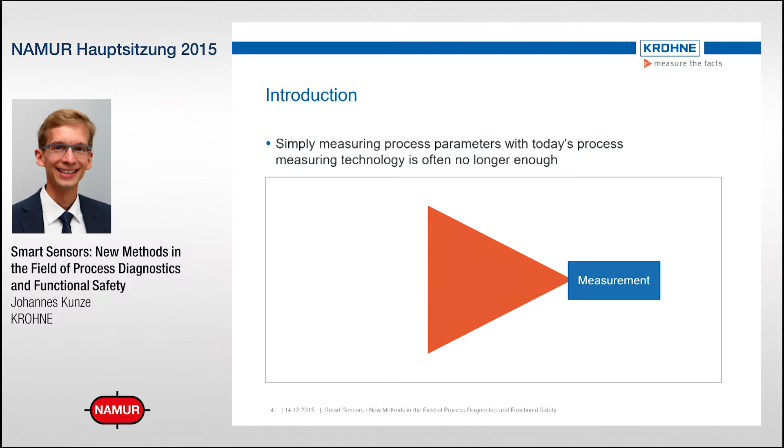We need process diagnostics. In case of safety loops, functional safety becomes more important. You need a functionally safe field device with self-diagnostics with high diagnostic coverage.

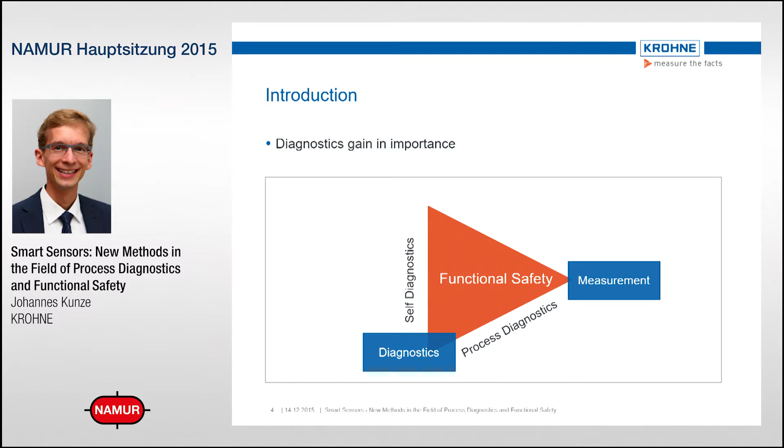That's quite a lot of diagnostics which I just mentioned. Since more diagnostics may result in false alarms, these smart devices could reduce the device availability or even the plant availability. Therefore, the question is, does it mean more diagnostics, less availability? Well, it's a challenge for us measurement instrumentation companies to provide you accurate, reliable measurements with lots of process and self-diagnostics without reducing your plant availability.

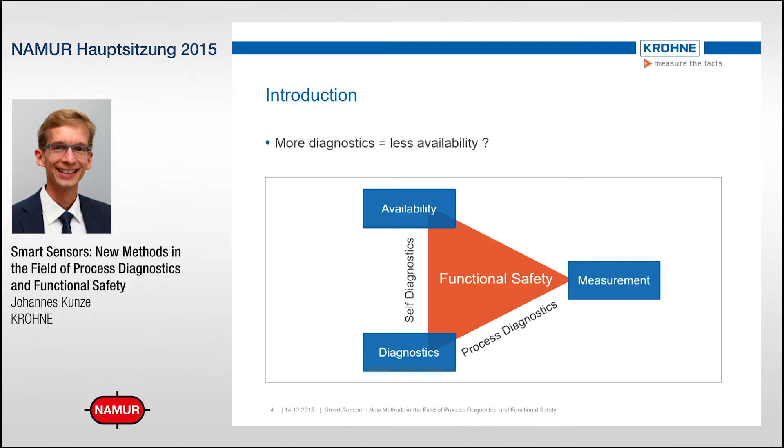Now let's continue with the process diagnostics. Let's start with the process diagnostics for flow meters.

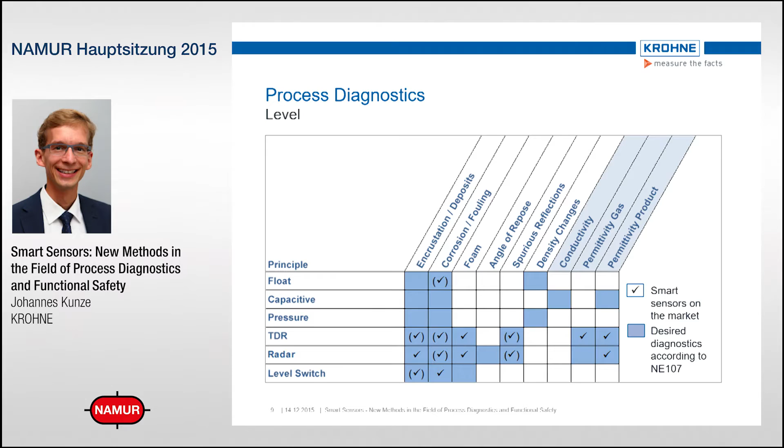Now I would like to focus on a diagnostic which was quite critical for a long time: entrained gas and flow measurement. In general purpose measurement devices such as Coriolis mass flow meters, entrained gas typically stopped the entire measurement. Now we are able to measure with entrained gas and perform diagnostics.

But what's the challenge with entrained gas and Coriolis meters? Entrained gas is a kind of two-phase flow, which exists in various flow regimes. For example, mixed bubble flow, when we have evenly distributed gas bubbles, or fully separated wavy flow.

Unfortunately, the flow regime varies strongly. It is quite transient, which makes measurement difficult. Two-phase flow occurs in various situations. Sometimes it could be dangerous, as for example with cavitation, but sometimes it's really unavoidable in the startup of a system or sourcing of storage vessels when they become empty, or the empty-full-empty batching, or if you have outgassing of a process liquid.

All these cases have one thing in common: you should be able to measure the process fluid. In addition, you should also be able to detect the entrained gas.

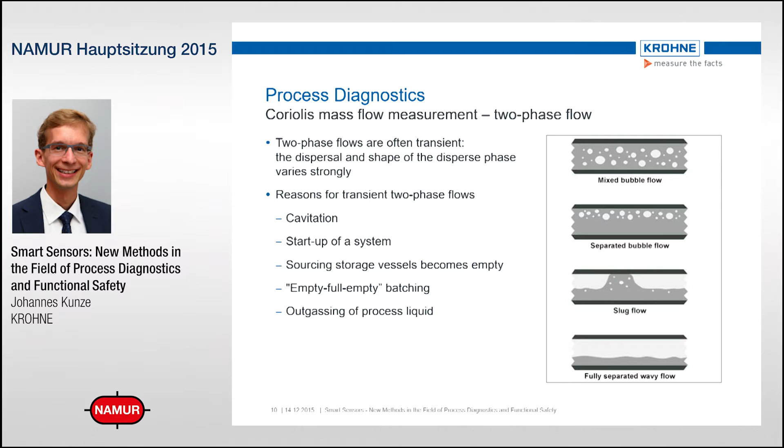So let's discuss the first aspect, the measurement. In Coriolis mass flow meters, the flow tube oscillates, which is necessary to use the Coriolis effect. Within this oscillation, the liquid and the gas phase have a relative movement, which causes a damping of the oscillation. In addition, the gas bubbles are compressed, which also damps the oscillation. The resulting oscillation amplitude of the tube varies a lot and becomes quite small.

Furthermore, the signal-to-noise ratio decreases by entrained gas. We have quite strong transients in the density and the mass flow, and therefore the flow tube oscillation frequency varies strongly. And finally, the signal-to-noise ratio is decreased.

Conventional mass flow meters could not follow the frequency changes, and they could not compensate the amplitude variations. Therefore, the tube vibration could not be maintained. The mass flow meter has quite large measuring errors and finally stops the measurements.

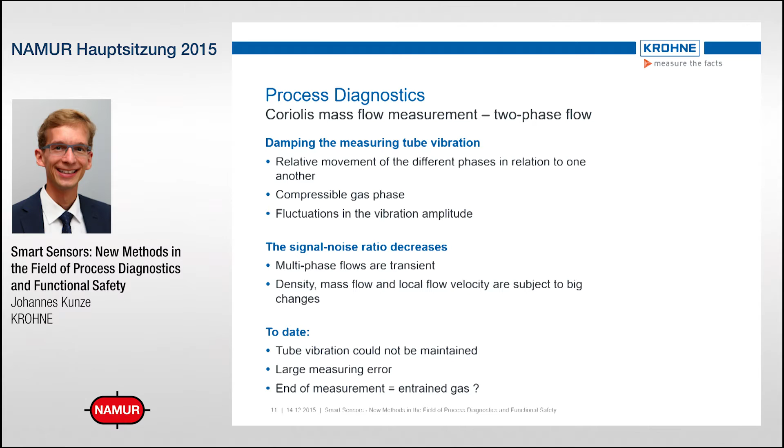This was basically a quite good diagnostics for entrained gas, because typically the mass flow meters stop the measurement in case of entrained gas. These conditions are really challenging, these flow conditions, and we at Krohne accepted this challenge.

We developed the so-called entrained gas management, a new concept for signal processing. With this type of processing, the meter can measure with any amount of gas from 0 to 100% gas content. And if you have similar measurement conditions, similar pressure, for example, you also get reproducible measurement results.

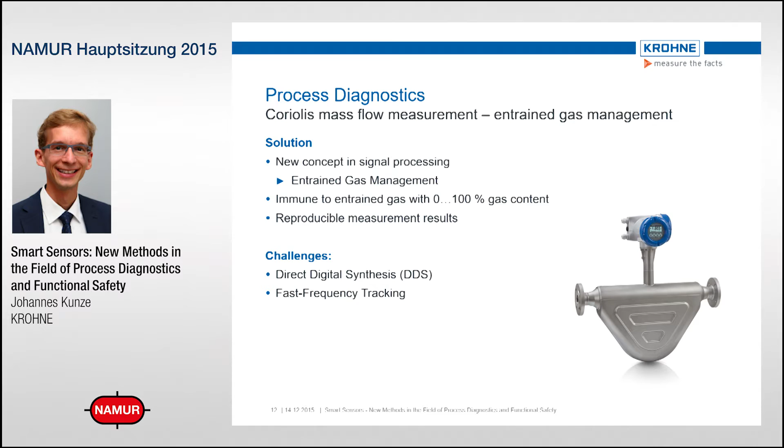The two key measures in the entrained gas management are direct digital synthesis, short DDS, and the fast frequency tracking. In order to understand these effects of these measures, let's have a brief look at the Coriolis signal processing within a sensor electronics in a Coriolis mass flow meter.

So the flow tube is excited by an electromagnetical actuator. The signals for this actuator are generated by the DDS, which is an amplifier and a digital to analog converter. And finally, in the digital world, it's a signal generator. It generates a sinusoidal signal. It's a synthesized sinusoidal signal with a known amplitude, frequency, and phase.

And the flow tube oscillates. The oscillation is being measured by two sensors, and the sensor signals are amplified, converted to the digital domain, and demodulated using the signals from the signal generator. There we have really narrow bandwidth demodulation, and therefore the noise generated by the entrained gas can be suppressed.

The demodulation generates two complex sensor signals consisting of the real and the imaginary part of both sensor signals. These sensor signals can be used to feed the amplitude control and the phase control. The phase control is the part which is the so-called fast frequency tracking. It can follow the resonance frequency of the tube really fast. And the amplitude control can compensate the amplitude variations of the sensor tube quite well.

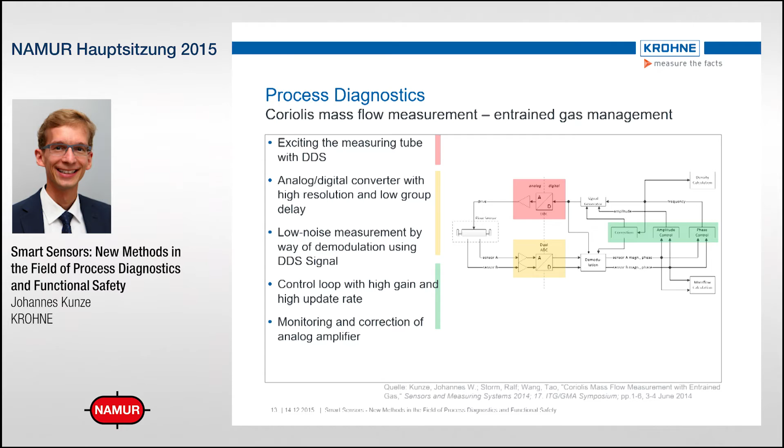In our testing, we were not able to stop the tube oscillation, independent of any amount of gas. So the sensor signals can be used, of course, for the most important part, the density calculations, there we use the frequency, and the mass flow calculations, there we use directly the sensor signals.

Now we have solved the first challenge. We can measure with any amount of entrained gas. Now we have the second challenge: detect the entrained gas. For this purpose, we make a statistical evaluation of the sensor signals and the drive current and generate the so-called two-phase signal. So what's up with the two-phase signal?

Let me give you an example. Here we have a measurement of a full-empty batching. This means the tube is empty in the beginning and the end of the batching process. You see the mass flow is in the beginning 0, then it increases up to a certain level, it decreases, and then we have reverse flow, you see, and at the end, of course, the flow is again 0. Having a look at the density, in the beginning it's air density, the tube is empty. Then we have water density, a filled tube, and at the end we have again an empty tube, air density.

So the smart operator could see that we have obviously entrained gas in the beginning and the end of this batching process. But we are not talking about smart operators, we are talking about smart meters. And therefore we have the two-phase signal. You see that the two-phase signal increases in the beginning of the batching process and in the end of the batching process.

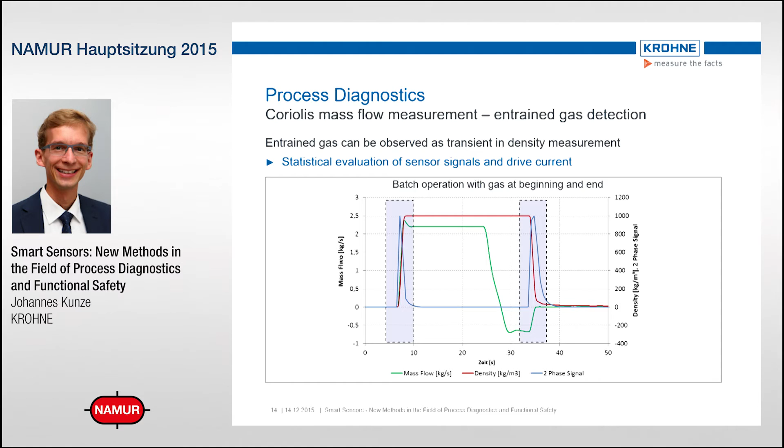This allows us to detect, on the one hand, the entrained gas, and we could even estimate the amount of entrained gas by having a look at the maximum of this two-phase signal. If you are only interested in detecting two-phase signals, we can set a threshold which can be used in the NE107 signaling, which I would like to address in the following.

The NE107 specifies the status signal of field devices. Diagnostics should be provided action-oriented and evaluated by using one of the following 4 signals, which you might know: failure, out of spec, function check, or maintenance required, each with a separate color.

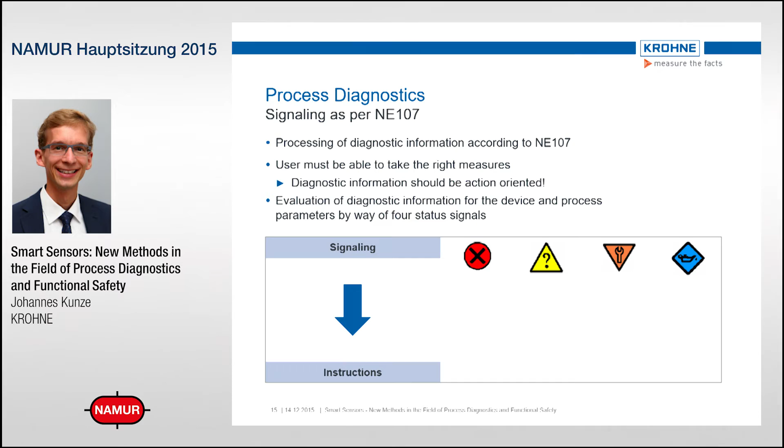Giving an example for the new OPTIMASS 6400 SIL, for Entrained Gas, the meter shows out of spec, a message that two-phase flow was detected, and it also shows you a countermeasure check process for Entrained Gas. That's what you could see on the screen of the device. Of course, the same status information is provided via bus interfaces.

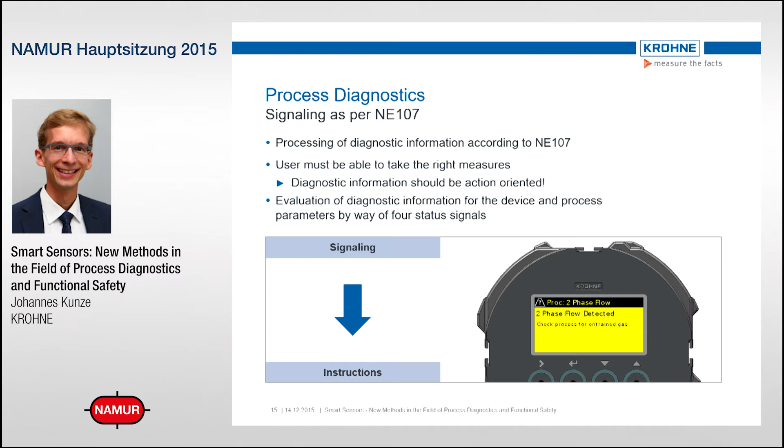Field devices have typically much more diagnostic information, since it's quite hard to understand the problem. In case of a status message, we enhance the status concept in the NE107 by providing groups called sensor, electronics, configuration, and process. A status message is sorted into one of these status groups.

So you directly can see if the problem is in the sensor, electronics, or if it's a configuration or process problem. Furthermore, the status groups with variable status signals can be selected by the operator, for example the two-phase flow. Only the operator can decide if entrained gas is critical, if it is a failure, or if it should not be signaled at all.

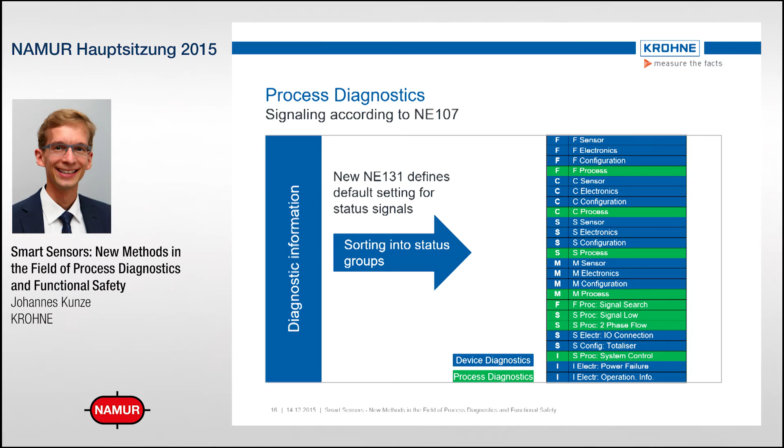Considering self-diagnostics, we are approaching the second part of this presentation, which is functional safety, which has a lot to do with self-diagnostics. Currently, there are quite some functionally safe devices according to the 61508 standard SIL 2 on the market. 5 years ago, SIL devices were quite different than today. SIL devices started as proven-in-use devices, which were standard devices that later got a SIL certificate and failure rates. Today's devices, however, were developed according to 61508, which is a significant difference.

They have higher diagnostic coverage, and therefore they need much more process and device diagnostics, in particular the latter. All these diagnostics tend to reduce device availability for the sake of safety. Furthermore, they require safe prioritization, which is typically quite complicated.

Statistics of field devices in plants show that typically 3 to 5% of the measuring points are safety applications. The rest, 95% or even more, do not need SIL devices, or at least they do not want the mentioned disadvantages. Therefore, some field device manufacturers decided to sell two different devices, one for SIL and one for non-SIL. This, however, is quite unpleasant. This makes prior use, which is requested in the NE130, quite difficult, because you have a really small amount of SIL devices and it's hardly possible to make any statistics with such a small number.

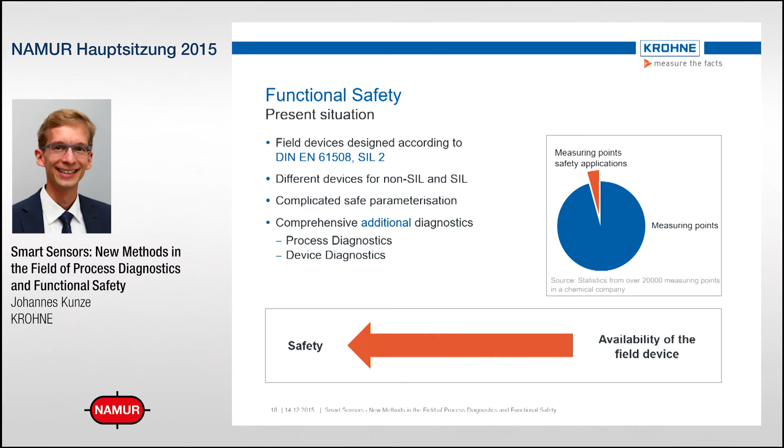That's the reason why NAMUR discussed SIL devices in the new version of the NAMUR standard device, the NE131. This SIL device should be developed according to 61508, SIL 2 and low demand. It should have, and that's the most important aspect, the same hardware and same software for SIL and non-SIL devices. So there's no differentiation between a SIL or non-SIL device, you buy the same device. Then it's possible to use the prior use approach according to NE130.

Then diagnostics should be reduced to only the necessary diagnostics. This does not mean less diagnostics, it means only the important or critical diagnostics should set the failure signal. In particular, considering process diagnostics, only detected imminent irreversible damages which could happen to the meter should be signaled with a failure signal. Other process diagnostics should only be signaled by, for example, out-of-spec or other information.

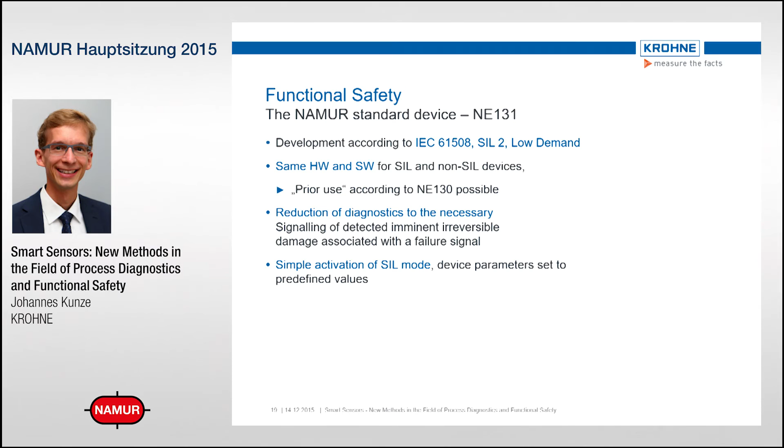Then a SIL device has, of course, to be switched to a SIL mode, and this should be done fairly simply. A lot of parameters which are SIL critical should be set to predefined values, and those which you can configure shouldn't be many parameters, and they should be documented quite simply. Finally, a SIL device should not have a best-before date. There shouldn't be a formal limit on useful lifetime in functionally safe devices.

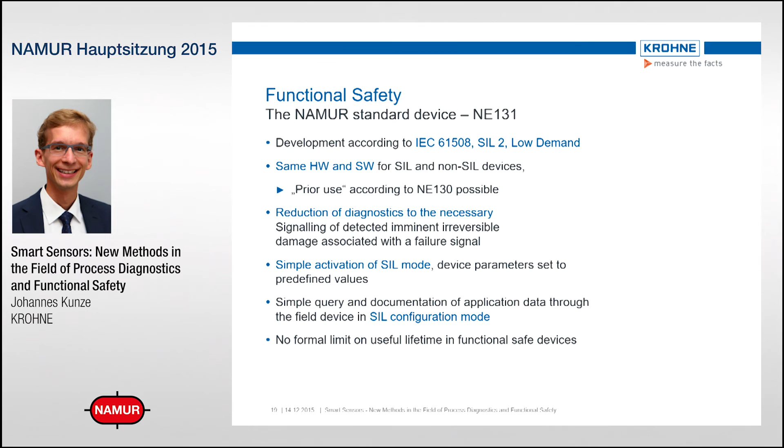Besides all these requirements for a SIL device, there are some other things which you could do wrong in the design of a SIL device. I will show you now three examples for a SIL device, a present situation on the market, and a smarter solution. Let's discuss safe parameterization.

A safe parameterization should be performed via a safe channel. Parameterization was done so far via HART, but HART is not a safe channel because the requirements for field bus communication, such as checksums or sequence numbers, are not fulfilled. Therefore, SIL devices on the market today always need a verification at the local display. So you can still configure via HART, however you have to go to the display and set the device to SIL mode. This is quite unpleasant if the device is in your plant at 10 meters height, if it's not accessible.

Therefore, we thought about a solution which is a little bit smarter. We developed a concept which is certified and patented, which allows you to verify the parameters also via HART. So you can set up your meter completely via HART without accessing the meter.

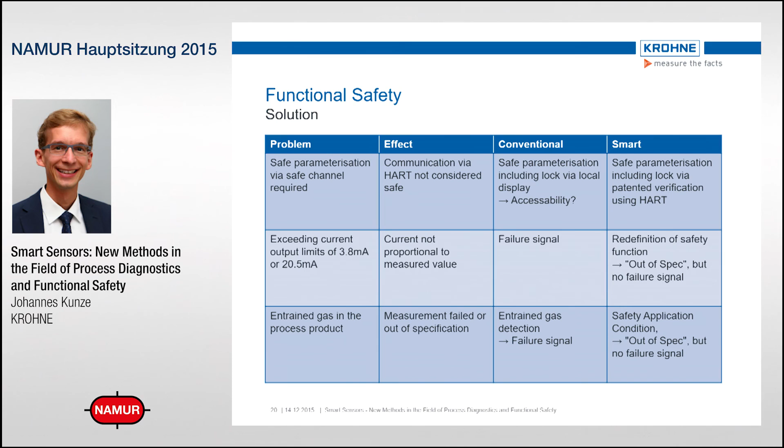All these aspects are part of the KROHNE SIL strategy, which we realized for the first time in the OPTIMASS 6400 SIL, the new SIL device in the KROHNE family. This device has a SIL and non-SIL mode, using the same hardware and software in both safety modes.

Well, then proof test for such a device should be simple. You know, SIL devices always have a small number of dangerous undetected failures, which cannot be detected by internal diagnostics. Therefore, you need to make a proof test. A proof test by just pressing a button on your device cannot detect these undetected failures. Otherwise, they wouldn't be undetected by the internal diagnostics. We minimized in the design the number of undetected failures, which maximizes your proof test interval.

And if you have to perform a proof test, normally you have to do it once every year, it should be possible to make a partial proof test. That's an inline proof test without removing the meter. The proof test coverage for such a partial proof test is more than 70%. Of course, with a full proof test, you have a much higher proof test coverage.

Then a safe device, a SIL device, must have a safe parameterization. And this really should not be complicated. It should be as simple as with non-SIL devices. You should be able to make this safe parameterization via HART or a local display, and it should be possible within less than 2 minutes.

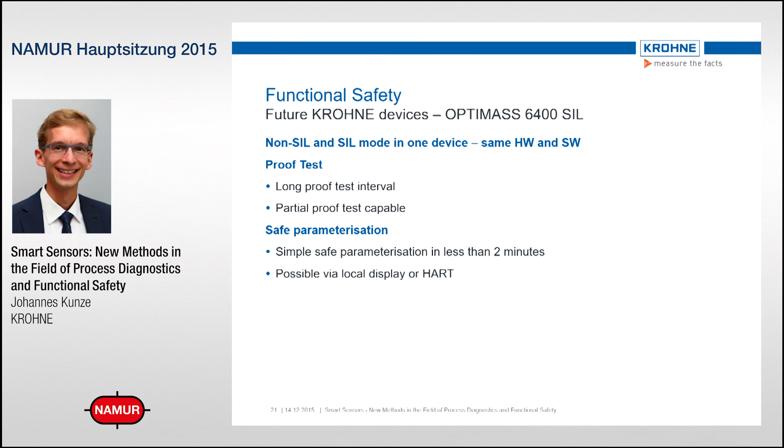Yeah, let's talk a little bit more about diagnostics. Many people talk about diagnostics, diagnostic coverage, but actually nobody talks about the timing. Diagnostics are running all the time in the device, but it takes some time until all diagnostics are carried out at least once, the so-called diagnostic test interval. Many SIL devices on the market have a diagnostic test interval of hours, which means you get a failure information really late.

We want to have quick diagnostics, a diagnostic test interval of a few minutes. Within the OPTIMASS 6400 SIL, you have a diagnostic test interval of 1 minute. So within 1 minute, you get to know if there is a problem in your device. In general, process diagnostics should only be optional, meaning only diagnostics of imminent irreversible damages result in a failure signal.

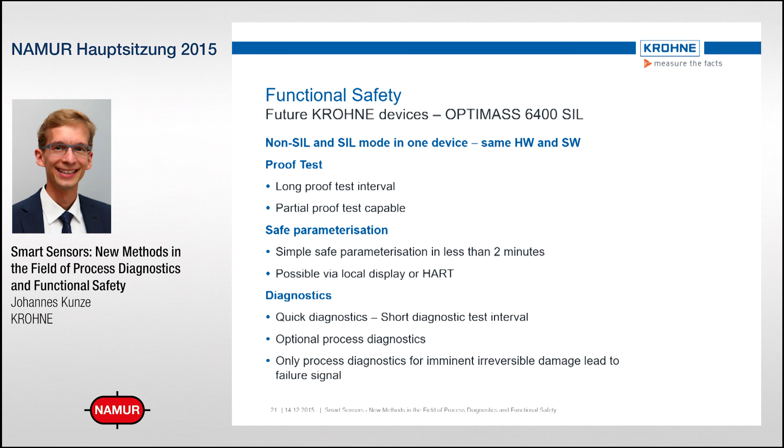Well, let's summarize the presentation. I've given you an overview of process diagnostics of smart sensors. In particular, I focused on the diagnosis of entrained gas in Coriolis mass flow meters. I explained how these mass flow meters could measure in case of entrained gas, because in former times this was really difficult. Then I pointed out that the proper design of diagnostics for these SIL devices can significantly improve the availability.

These aspects you will not find in datasheets or safety manuals of a SIL device. You can only find them by asking the right questions. So that's what I can recommend when you next time buy a SIL device. And finally, I've explained the SIL strategy using the example of the OPTIMASS 6400 SIL, which is a non-SIL and SIL device within one device, has a smart proof test concept and a diagnostic concept designed for high availability of the device.